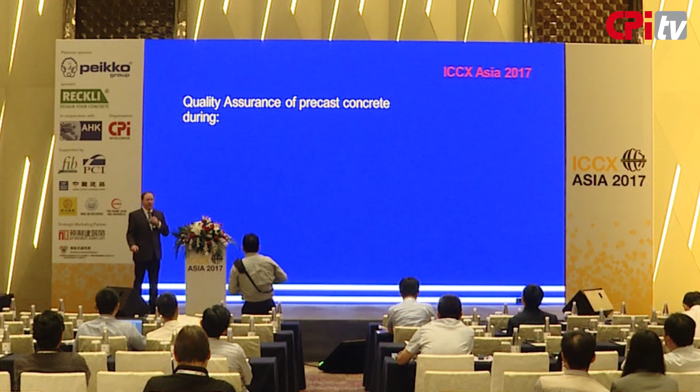So we'll talk about today the quality assurance of the design of precast, the production of precast, and then the final assembly. And each one plays a critically important role in the success of a project and the longevity of a precast concrete project.

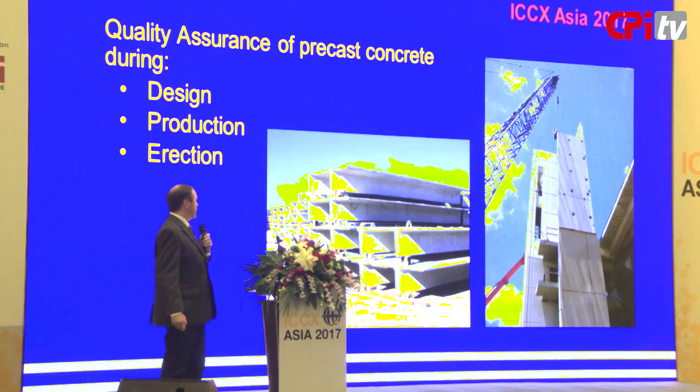So all of us here in this room, we're all stakeholders in the concrete industry, the precast concrete industry, and we're involved in construction, and we all know that construction can be difficult.

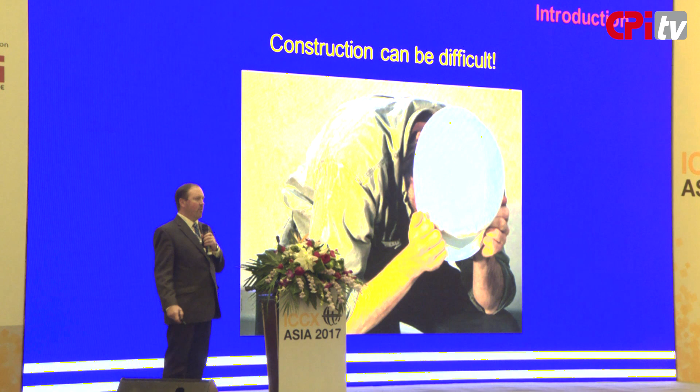And so we're going to talk about what we want to happen with respect to our projects. We talk about our first priority, safety, and that goes along the same lines of Professor Pampanin's explanation of producing a safe project for seismic events. We also want that project to be safe during construction and also during the lifetime of that project.

We also want that project to be designed and built as designed and expected. Of course, our architect friends and engineering friends all want that as well. On time, definitely, but even better early, right? So we definitely want on time and on budget, or even again, better under budget.

Of course, what that leads to then is our customers. We want happy customers. We want people to be happy who occupy these structures, during construction and throughout the lifetime of that project.

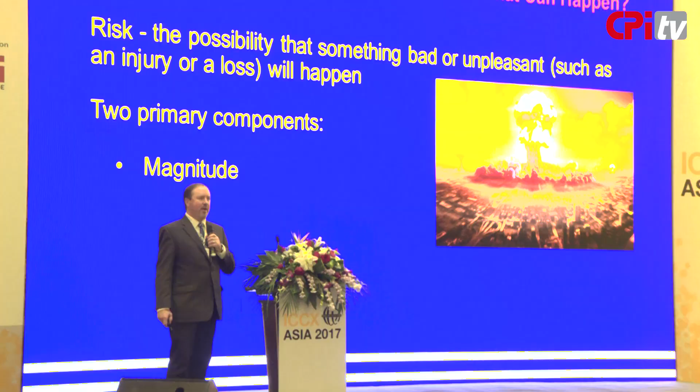So the two primary components of risk are the magnitude. Is it catastrophic, or is it something that just simply makes a bad day? And the other component is the probability of occurrence. So will this event, is it highly likely or unlikely? And that's how you measure your risk.

So our challenge here is to reduce our risk. How can we make that happen with a construction project?

So all projects are designed to meet some sort of expectations. Those expectations are generally defined in the project specifications. Sometimes it resides strictly in the architect's mind, and we have to become a mind reader to understand that, but that's another story altogether.

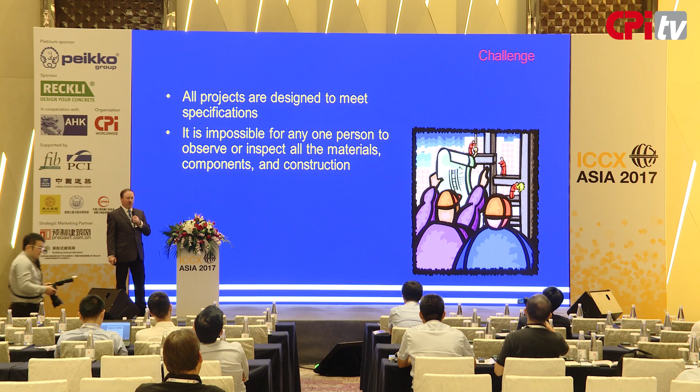It's impossible for one person to inspect and review and analyze every aspect of a construction project. No one person can inspect and review all the components, dozens if not hundreds of thousands of pieces and parts that take place on a project.

It's vital that procedures be in place that provide assurance that projects meet their design expectations. So how do we make that happen while reducing risk? Simple answer: a quality system, a documented system of checks and balances, analysis, plans, revisions, and this whole cycle goes over and over again.

It's critically important to understand that both quality and safety are linked. Of course, we want our buildings to be designed and built to be safe. That's what the public relies on design professionals and construction professionals to do. They rely on us to build structures that are safe not only during construction, but during the lifetime of that project.

Quality assurance is the best way to ensure that what you build is what you expect. Quality assurance and quality control are oftentimes used as terms that are interrelated, and sometimes they're switched around, so we'll clarify that here.

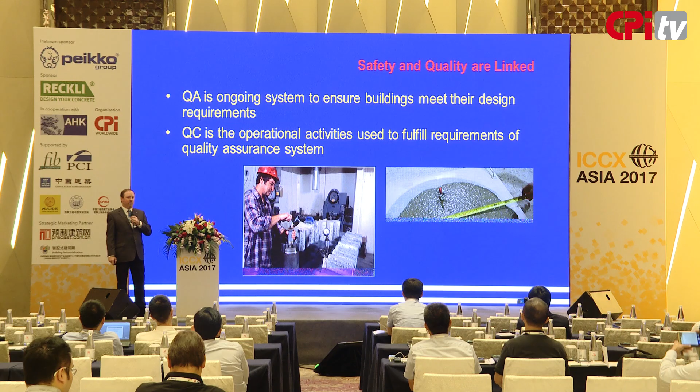Quality assurance is an ongoing system to ensure that buildings meet their design requirements. Quality control, then, is a part of the quality assurance process. It's really the daily activities that take place to check and measure and make sure that the quality assurance program is effectively being used.

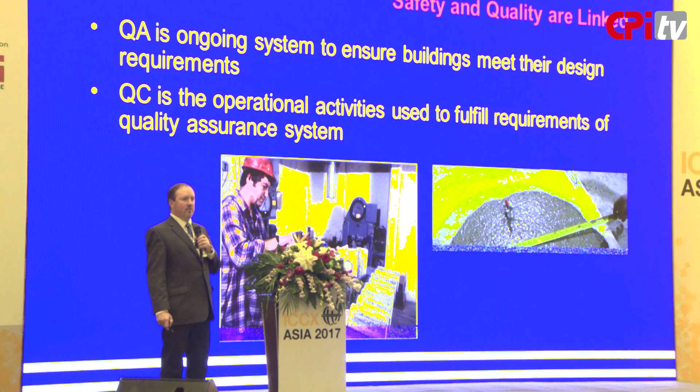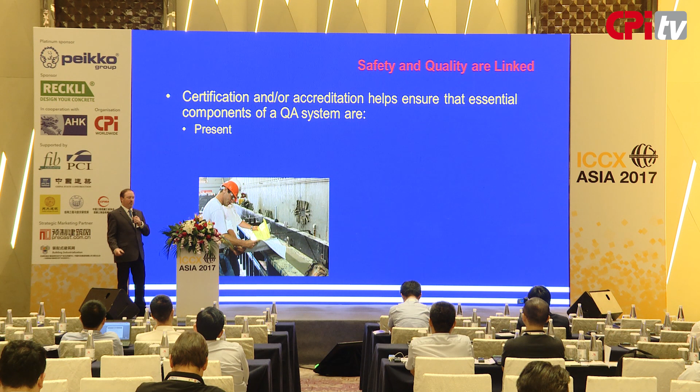Taking things one step further, we can talk about certification or accreditation. Certification is a higher level aspect of quality assurance. It's essential to verify that the essential components of a quality assurance system are both present and functioning properly. It also provides the highest probability of a successful project with that third-party verification.

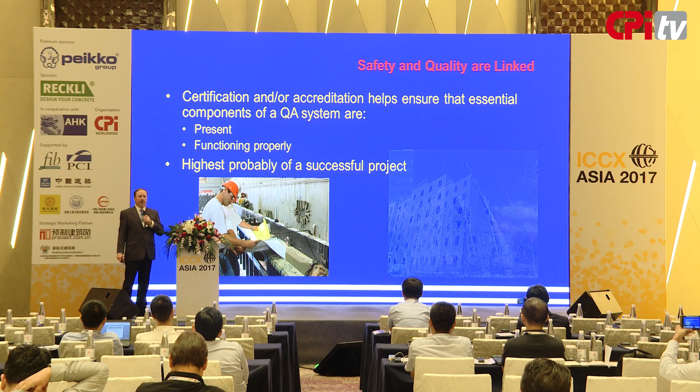With certification, people often think it's just someone coming in with their checklists, writing notes and checking things off, but it's really much more than checklists. Effective QA and certification programs are based on the industry's body of knowledge, and that body of knowledge is very important.

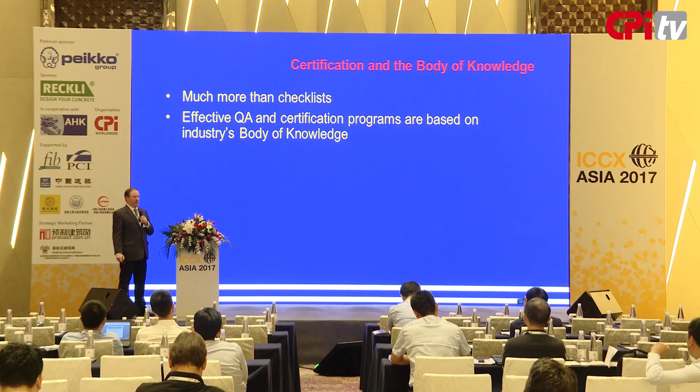The people in this room are part of the body of knowledge for the precast industry in China. Bodies of knowledge are generally developed by industry associations or institutes. The Precast Prestressed Concrete Institute is an example of an organization that's developed a body of knowledge—the collective knowledge of a group of stakeholders in an industry on how to design, how to build, the quality control aspects, certification, and so forth.

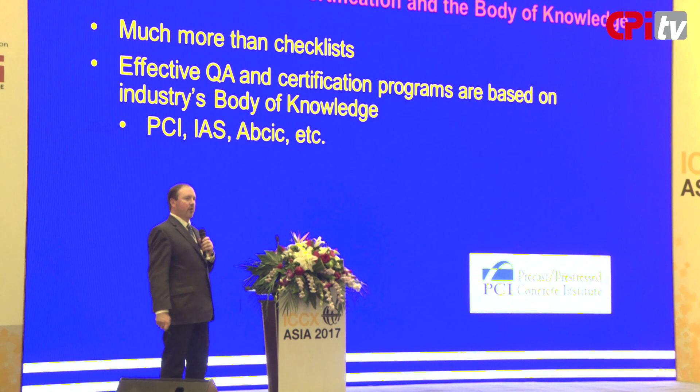Through the development of these bodies of knowledge, you can develop not only the design aspects for a project, but also the quality assurance aspects for production. I mentioned PCI—they've developed the body of knowledge for quality assurance, plant certification, personnel certification, and so forth. There's another organization, the International Accreditation Service.

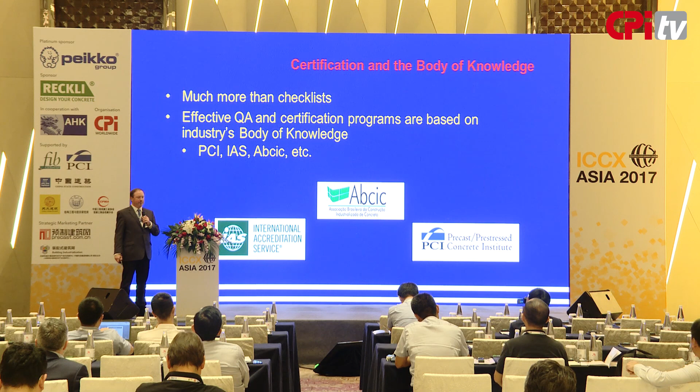They do the certification and accreditation of various organizations. And there's also ABCIC, the Brazilian Association for Precast Concrete, which has developed the body of knowledge in Brazil. These are just examples—it's important to have one organization really centralize the organization of that body of knowledge.

Let's talk a little bit about certification versus accreditation. Certification, again, is a program to check and ensure that the critical components of a quality assurance program are both functioning and present.

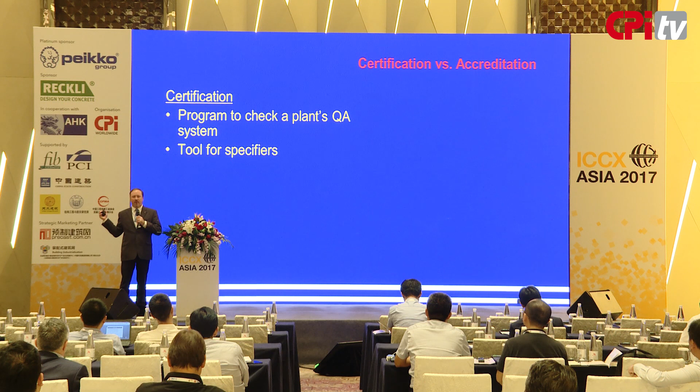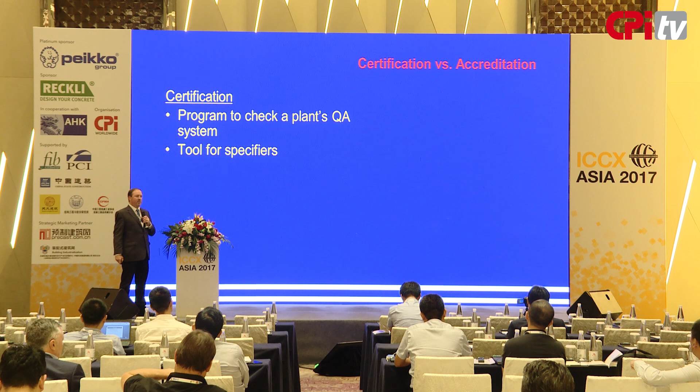Certification can also be used as a tool for specifiers. If I were an architect or an engineer designing a precast concrete project, I would want to know that the precast concrete producers fabricating the project's components are doing so at some minimum level of quality. To do that, you can specify the use of some sort of quality system—whether an off-the-shelf system, one you write yourself, ISO 9000, or a certification program that's already been developed, such as PCI.

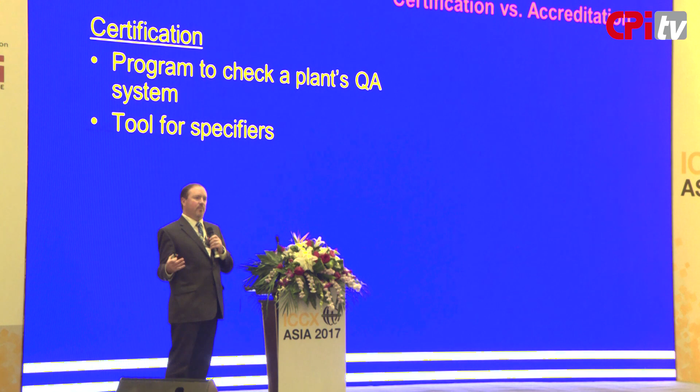It's a tool that lets you pre-qualify producers for your projects, and that's important. Just because you may or may not work for a precast plant, as a designer you have risk with those projects, and it's important to minimize your risk—this is one good way to do it. Owners and specifiers can pre-qualify and select producers based on qualifications already determined and evaluated through the certification program.

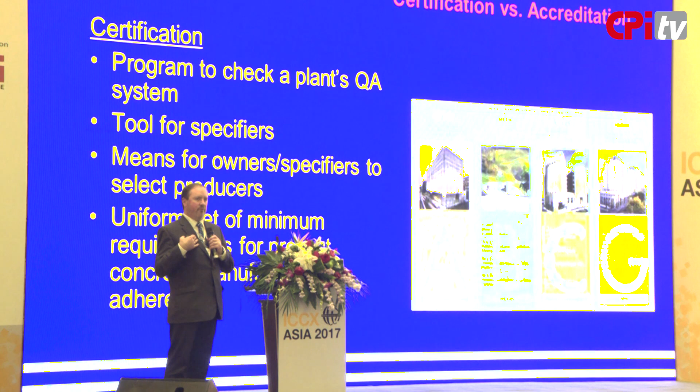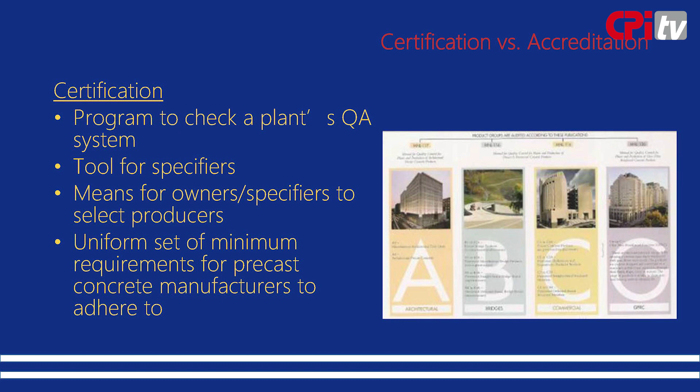On the flip side, if you're a producer, what I've heard from precast concrete manufacturers is they like when they see projects that require certification. What does this mean for them? It means all of the other plants submitting bids for that project also have to subscribe to some minimum level of quality standards, so they all operate on a level playing field.

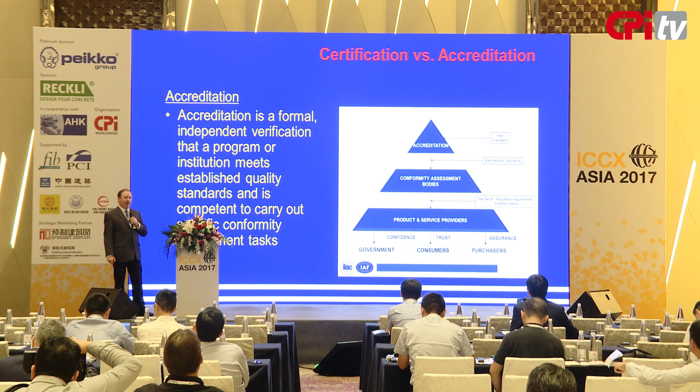Accreditation is another step above certification in general. Accreditation is a formal, independent verification that a program, organization, or institute meets established quality standards and is competent to carry out those specific conformity assessment tasks.

In this chart, the bottom layer of the pyramid is product and service providers, which would essentially mean precast concrete manufacturers. The conformity assessment body could be PCI, NPCA, or the Precast Association of China, should they wish to start a certification program.

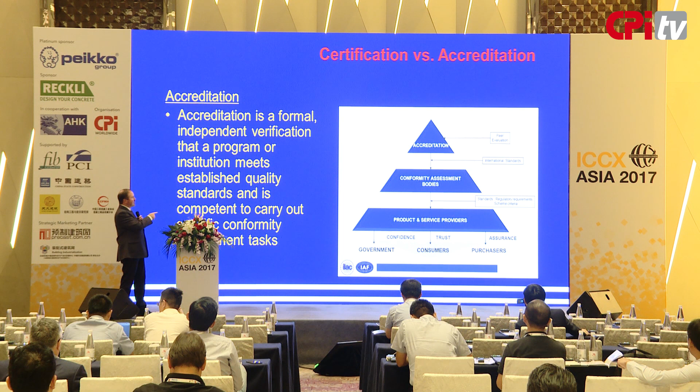Accreditation is one step above, where an organization verifies that the conformity assessment body, or certification body, is performing their certification activities appropriately and to international standards. One important note is the accreditation process does not necessarily require the conformity assessment body, but if you take out that middle tier, then you need technical experts to insert themselves into that process.

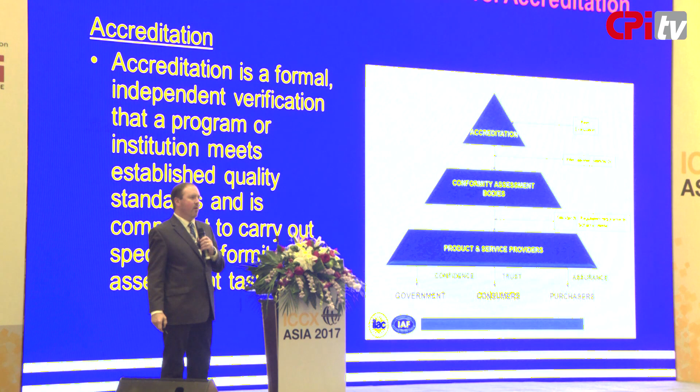The important thing is that the people at the bottom of this pyramid—the government, the consumers, the purchasers—they all want confidence, trust, and assurance that the bridges they drive across and the buildings they live in will be safe. They're the industry stakeholders this benefits.

So accreditation could be looked at as a certifying organization certifying another certifying organization, to verify that they follow international standards and best practices.

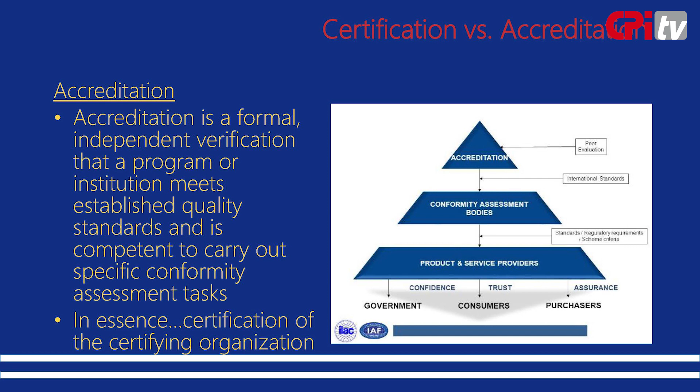We talked about the body of knowledge a little bit. It's a weird term, but it basically means the collective knowledge of the industry. There's not one person who has the body of knowledge, and it isn't simply the books on the shelf that an organization publishes—it's everything they do, all their activities, all their research and development, all those things that go into that collective knowledge.

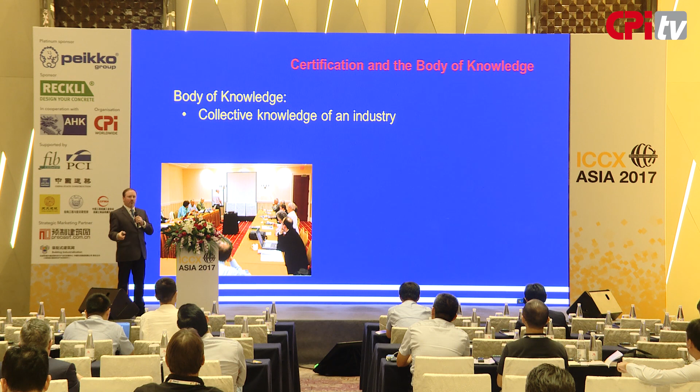That body of knowledge is used to develop building codes, design guides, education programs, and of course certification programs. But they're all essentially developed by people like you.

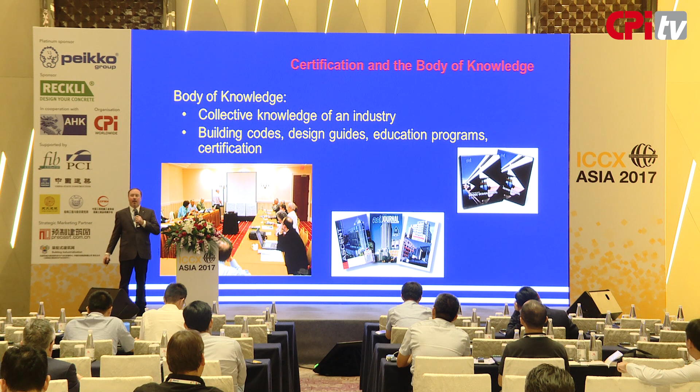Key elements of developing a body of knowledge include industry involvement. You've got to have a broad stakeholder aspect so that you have users, academics, designers, and even general interest—just people off the street, the public—because if they drive down the streets, they have an interest in the safe operation and construction of projects.

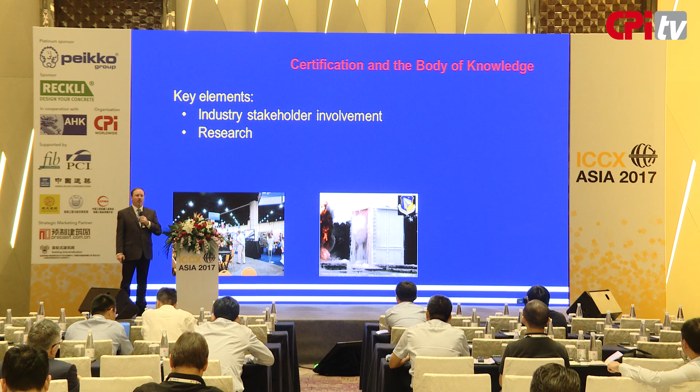Research is an important aspect where you can validate new ideas or new design concepts for engineering. In this case, there was validation of blast resistance—this precast concrete wall panel is being subjected to a high blast force, as shown in that middle picture. We want it to perform as we expect, and we do that through research.

Continuous maintenance is an important thing. You can't just take that body of knowledge and say, okay, we've got it, we don't need to maintain it anymore, it's good to go. It's something that has to be continuously maintained, again through organizations such as the concrete associations of various locations.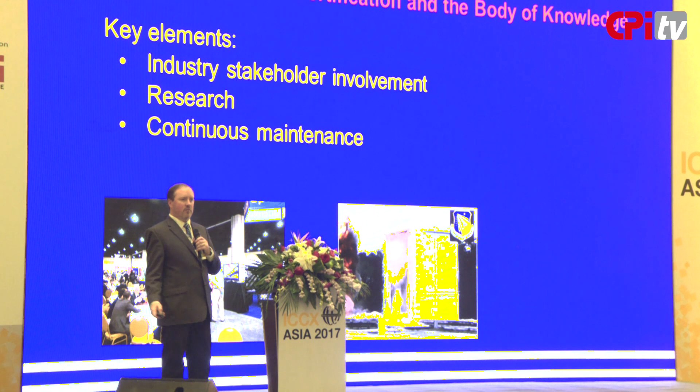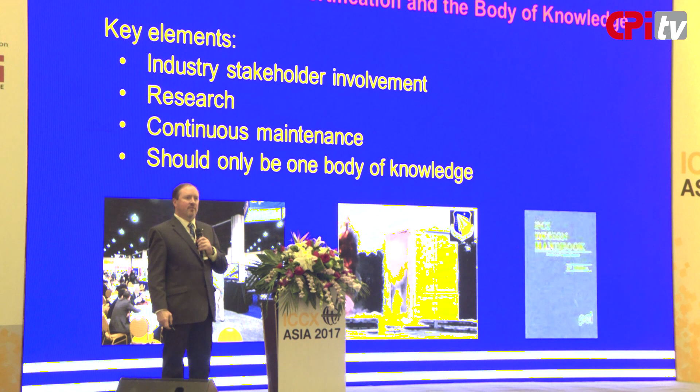One key point is that because everything comes from the body of knowledge, you should really only have one, in essence—because if you have multiple bodies of knowledge, it could cause confusion among building officials, designers, and people trying to apply the design concepts derived from that body of knowledge.

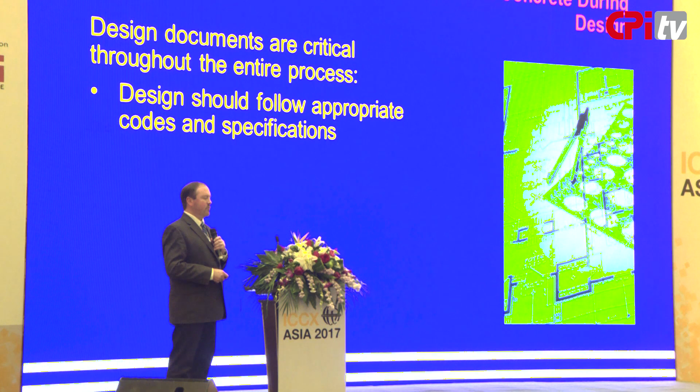During design, that's where everything starts to meet the paper, so design documents are critically important to the success of a project. Those designs should follow the building codes developed from that body of knowledge, and there should be a system in place to verify that the codes are followed correctly, and that calculations are done appropriately and verified. This should all be a documented quality system.

Another important thing I've seen is that design documents are revised again and again. So from the design office to the production floor of the precast plant, we want to be sure the most current version of those design drawings is being used. You have to have a process in place to ensure those design documents are current, because once you cast it in concrete, it's stuck that way pretty much.

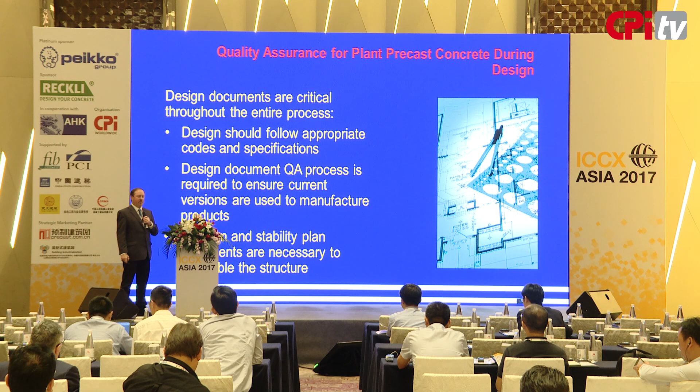And then for the erection process, the documentation process continues with the development of an erection and stability plan to ensure the safe assembly of the structure.

And then once you have the design process in place and you begin production, this is where the rubber meets the road as far as producing a quality project. So there are several key elements that are essential for establishing a good quality assurance process in a plant.

First and foremost is your people. Your people in the plant are your most important asset, and they should be properly trained or certified when necessary.

Another aspect is to make sure that your production demands do not overrule quality. So when we go into a plant and look at their organizational chart and how personnel report up to management, we want to make sure quality control personnel don't report to the production manager. We want to see that they report to top management or engineering, but they should not be in a situation where the client or contractor is demanding product be shipped to the job site while there's a quality problem that needs to be addressed. The two should be separated, the quality should be addressed, and then shipped. You don't want production demand to dictate what goes out the door and what gets shipped to a job site.

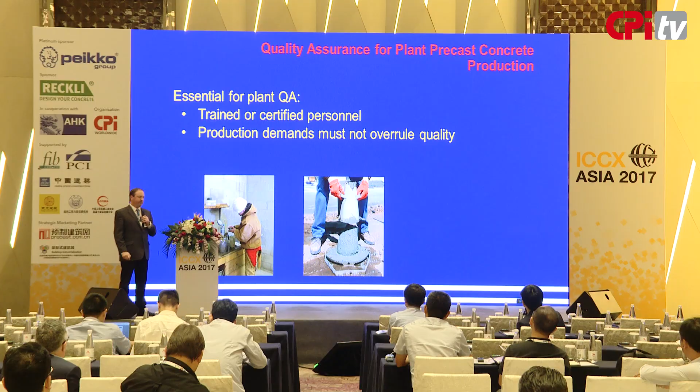And I've seen this also. You want the quality assurance and quality control aspects within an organization to be accepted by everyone, from the laborers all the way up to the president and top management of the company. Because quality assurance programs are not things you can switch on and off from project to project. It has to be something integral in the culture of an organization.

And I'm sorry to say, but I've been in some plants where it was obvious right away that the quality assurance program was not supported by top management, and there was a clear conflict between production and quality. So it has to come from the top, and it has to be drilled down, because it's everyone's responsibility to do things right within the organization. It's not just one person.

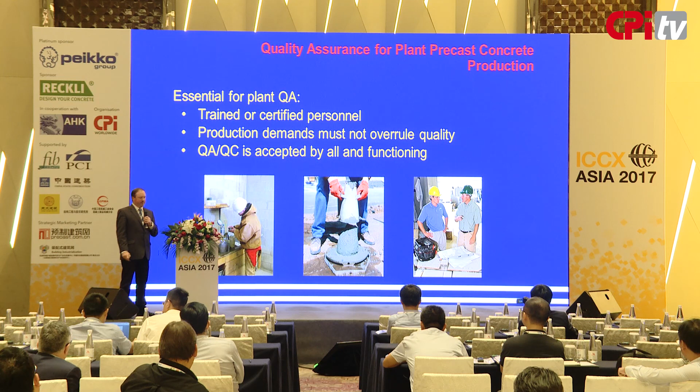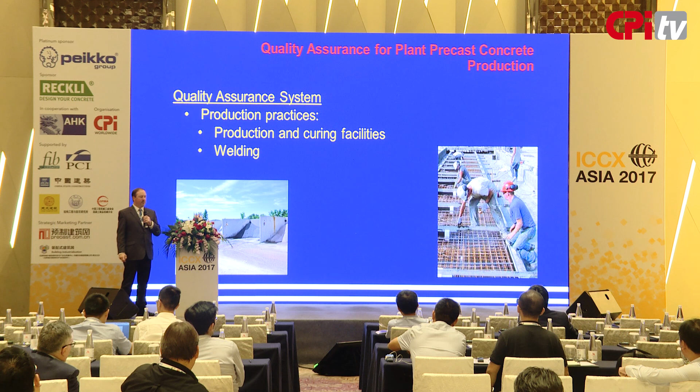As far as production practices are concerned, you should have a plant-specific quality management system that addresses certain aspects. Those production aspects are very important to the final quality, and they include your production and curing facilities, welding—if you do welding within the plant you have to ensure you have quality processes in place—and also your forms and molds, which are very important to the final geometry of the products.

Additionally, your hardware installation. In the United States, we have a saying: measure twice and cut once. So you always measure something twice before you do something you cannot change in the future. And the same thing applies to precast concrete.

We call it the rule of tens. Let's say you're in a production facility and there's a problem with the location of an embedded part, a lifting apparatus, or a connection. If that error is discovered in the plant before the concrete is cast, it costs, let's say, $1 to fix. If you cast it and it's still in the wrong place, but it hasn't left the plant yet, now we're talking about $10 to fix. And if it gets shipped to the job site accidentally and the problem still exists, then it's going to be 10 times that, or 100 times what it would have cost to fix before you cast the concrete. That's what we mean by the rule of tens—it's always best to catch these things as early as possible.

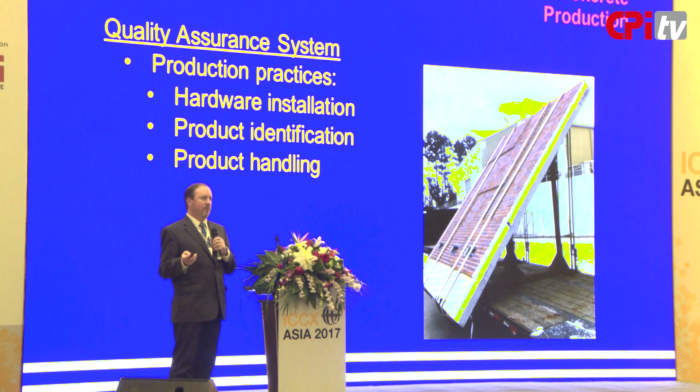Product handling is interesting because the structural design of many precast concrete products accounts for the worst case scenario and highest stresses. When does that occur? Often during very young age, when the concrete hasn't reached ultimate strength and when it's being handled, lifted out of the form, stripped out of the forms, and assembled onto the job. This is a very critical time for the condition of precast concrete, so you want to make sure you're handling and lifting it appropriately.

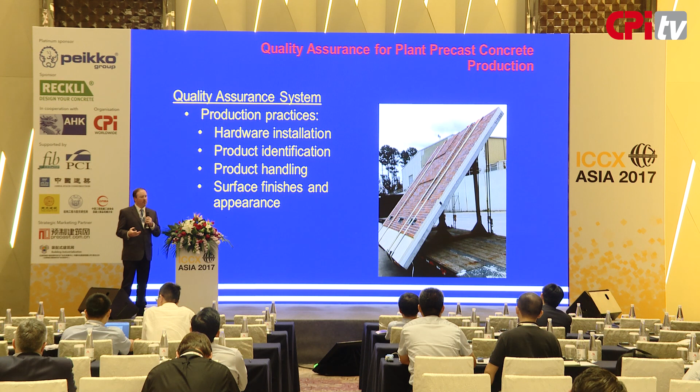Surface finishes and appearance matter too. The structural engineers want to ensure the product works structurally, but the fact is most complaints I've received have to do with what it looks like. Does it meet the architect's expectations? Is there staining? Are there cracks? Is there mismatching between wall panels? These are important things to designers, and we need a system in place to ensure surface finishes and appearance meet the owner's or designer's expectations.

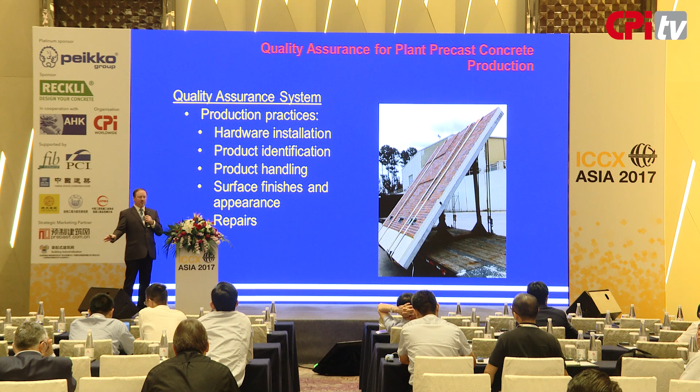Sometimes things happen and you have to repair a piece that was dropped, or a crack formed, or there was some honeycombing on a piece. But that's okay, we can repair it. We have processes in place for that, but you need a documented system for doing it, and you should classify repairs as major and minor. Minor generally means something easy and non-structural, whereas a major repair is something structural that needs to be evaluated by the plant engineer. So those processes need to be documented.

Raw materials and accessories are things the plant receives from a third party, so you're relying on them to supply something that meets a minimum standard. But it's still up to the plant to ensure what's coming in meets their specifications. So you have to have a process for all concrete raw materials, verifying through chemical analysis, mill test reports, and other documentation that it meets specifications.

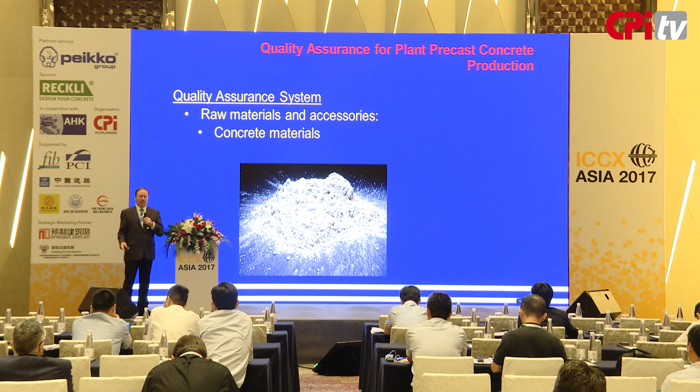And of course, reinforcement and hardware. Reinforcement is key for our structural capacity.

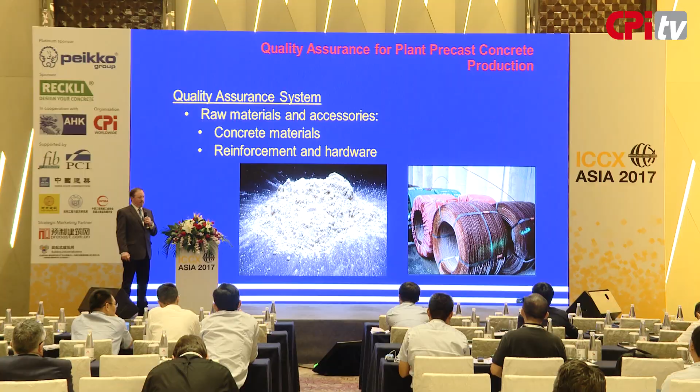The concrete itself, mix proportioning, is an important aspect of producing precast concrete components. Most plants I've been to have their own batching and mixing operation, so this is something they're directly involved in. Mix proportioning is an important aspect.

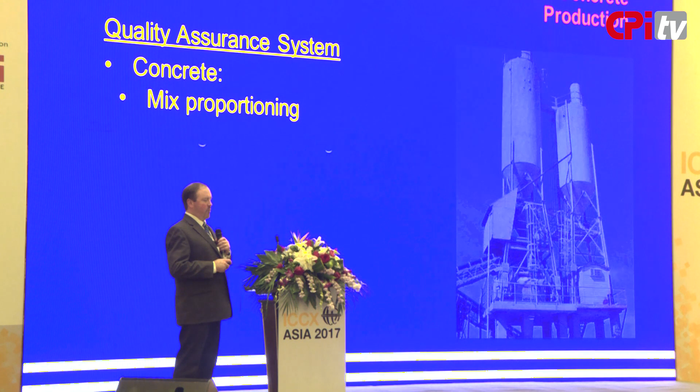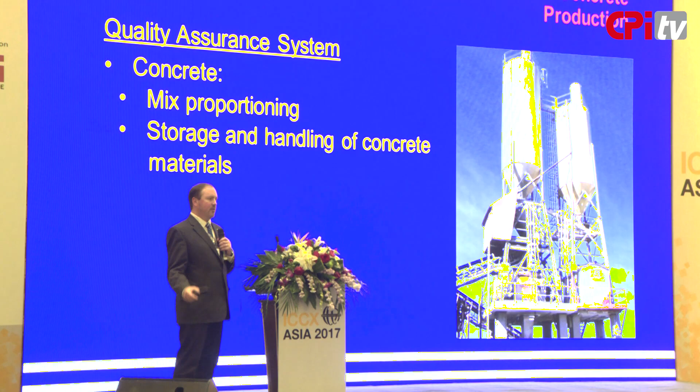Storage and handling of raw materials is important, making sure there's no contamination, that they're handled correctly, that coarse aggregate does not segregate. Your batch plant scale should be calibrated, and the whole system should give you what you expect. So when you batch a load of concrete, it should give you the weights of materials you're expecting.

Transporting equipment is also important, because you can have a very good mix, but if you use the wrong transportation equipment your mix can settle or segregate.

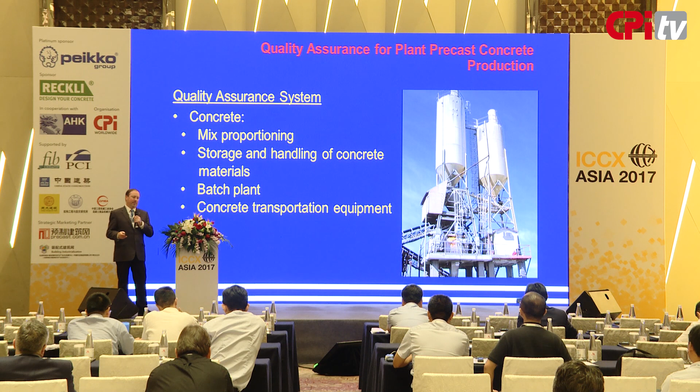Placing and handling equipment are important. Each operation has a little bit different way of doing things, so those specific methods of producing precast concrete should be addressed in the plant quality system manual.

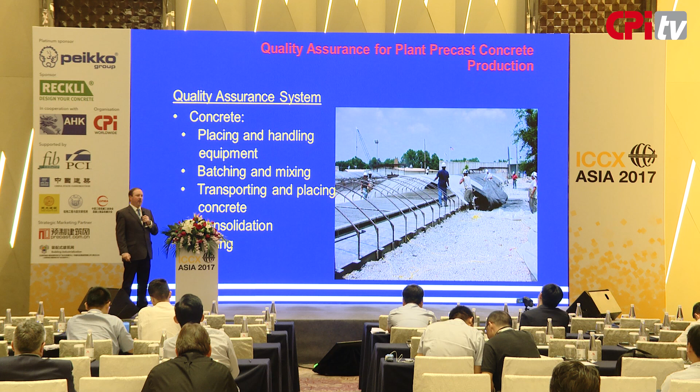We talked about batching, mixing, and transporting—very important aspects. Consolidating concrete: more and more we're seeing self-consolidating concrete, so this hasn't been as much of an issue, at least in North America. I don't know how much is used in China, but it's been helpful in the United States, eliminating a lot of problems with consolidation and honeycombing. Surface appearance looks very good. And curing can have a substantial impact on the long-term durability of your concrete.

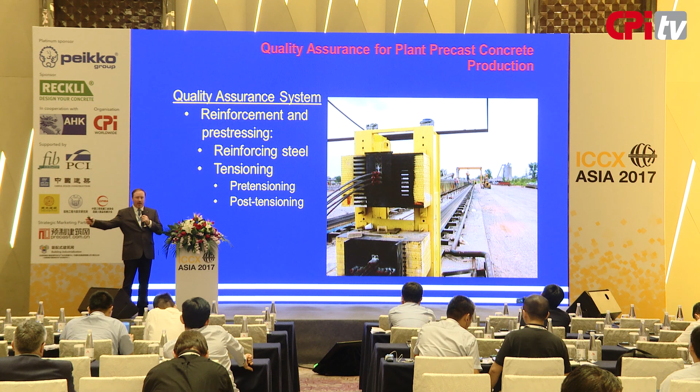Reinforcing and pre-stressing: the placement of reinforcing steel is very critical, as well as the tensioning operations, whether pre-tensioning or post-tensioning. You have to have proper QC checks for verifying elongation and the proper force in those tendons.

Quality control operations, these guys are always very busy. They're busy inspecting and testing various raw materials, concrete, pre-pour and post-pour inspections, and they're also doing a lot of record keeping.

Record keeping is necessary for quality control. Oftentimes neglected, but very, very important, especially when you want to prove to someone that you've followed proper procedures. If something happens later on, some sort of damage or collapse, you want to make sure you have information in your files to prove that you did what you say you did correctly.

Most plants will have laboratory and testing facilities on site. If they don't, then they will outsource that and have someone else do the testing for them.

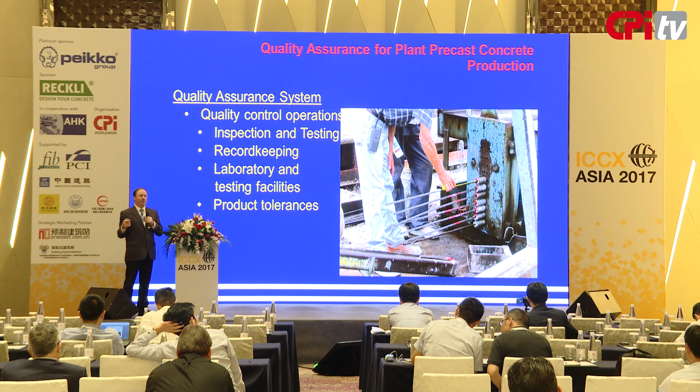Product tolerances are very important because you not only have to put the building up and have it be plumb and have pieces fit together correctly, but you also have to deal with your interfacing tolerances between different materials. Your windows will have different tolerances, as well as other materials being used in the building or project.

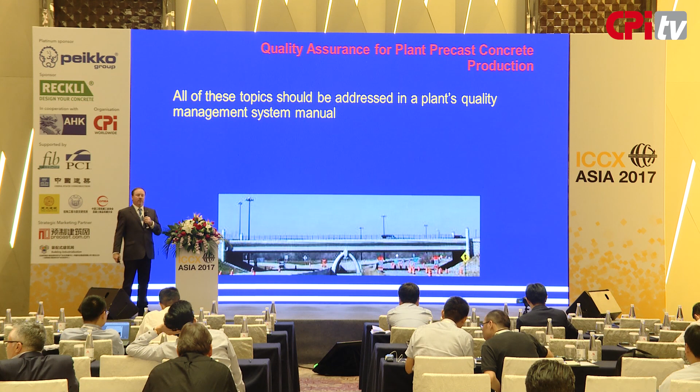All of these things should be addressed in a plant-specific quality management system, written for that location. You can't just take a quality management system manual from another organization and put your name on the top and say, okay, we have our quality management system, because it's very specific to that operation and that location.

That quality manual should be reviewed at least annually, if not more, or whenever necessary, and that should be done with top management involved, not just the quality people.

They should also perform annual internal audits. Those internal audits should be done by someone who is not directly responsible for the work that they're auditing. So I shouldn't be auditing my own work. If that's the case and I'm doing an internal audit, I need to ask someone else to do the audit for me.

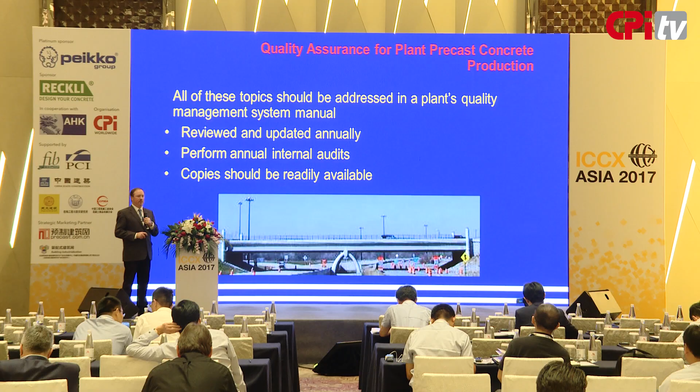Copies of those manuals should be readily available throughout the production plant so people can easily access them. Whenever changes are made, those manuals should be replaced, and make sure that everyone has a copy of the current manual. I've seen that.

So we've done all this work in the plant, we've done all this work to be careful about the design, and then we go to the job site, and we need to make sure that same careful attention is also taken to the project site.

Proper erection is vital to the performance and safety of the structure. I can't say this enough. At one point in time there was a major collapse, and that was the reason why the PCI erector certification program came into existence, because there was an issue that took place.

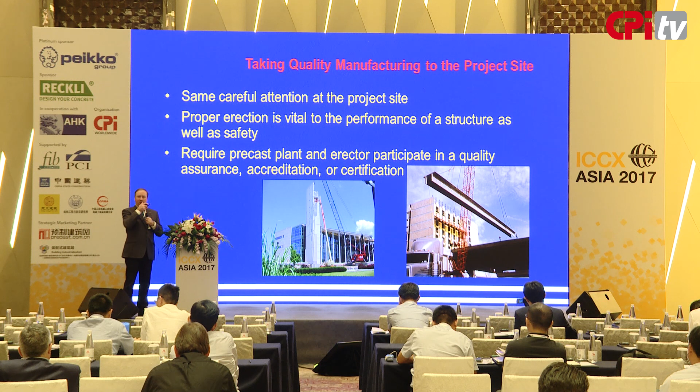We want to make sure that not only does the precaster follow a quality assurance program, but the installer or erector follows a quality assurance program as well. That program really focuses on safety. There's a lot of safety that goes into the erection procedures.

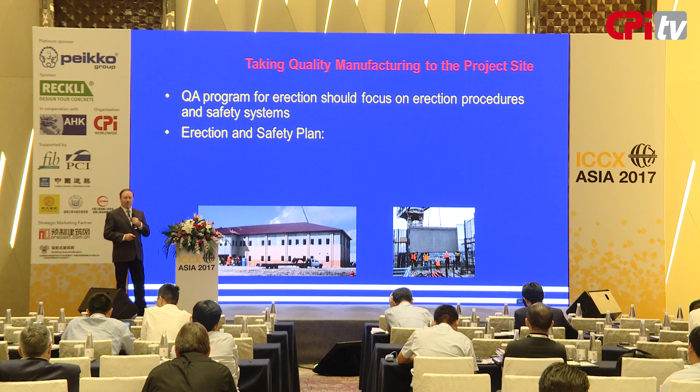The erection and safety plan should be specific to that project. They have to address specific fall hazards and protection issues. You talk about the scope of the safety practices of erection and patching, because we know that patching sometimes takes place on the job site after it's been installed, so we have to do that safely.

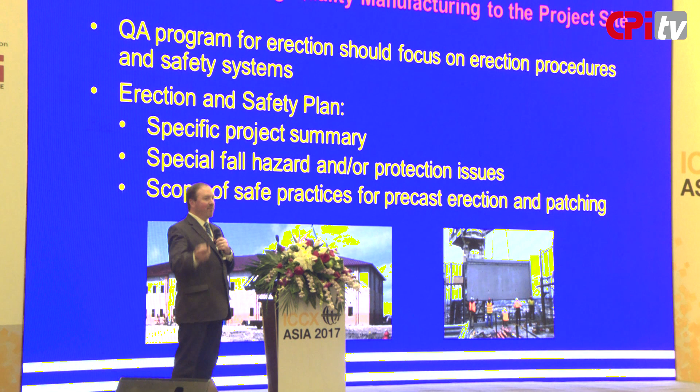You should define your safety monitor duties - that's the person who's in charge of safety on the job site - and talk about the type of job site safety practices that will be employed, including a daily job site checklist for erection safety. All these should be documented.

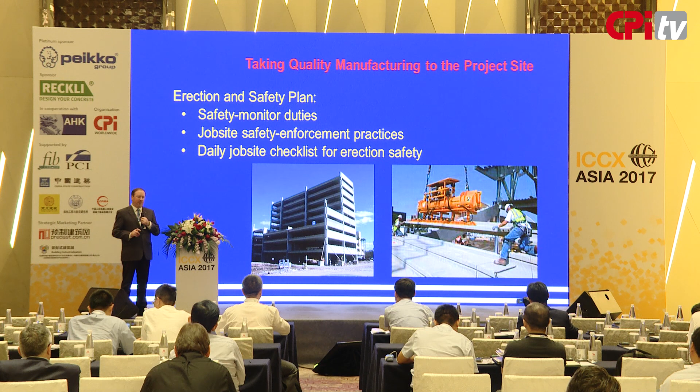You should have a drawing that shows where the crane will be located, where the trucks drive in and unload the product, and access roads. You should have some sort of documentation about sequencing of erection and bracing plans, and a list of emergency contacts. If an emergency should happen, you should be able to get in contact with emergency people right away.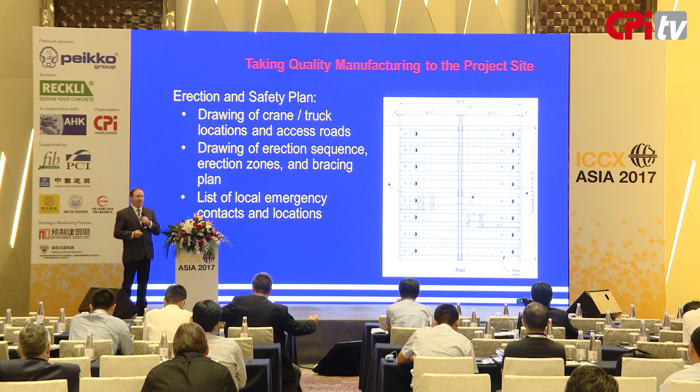So you need to review the rigging and bracing requirements - now this is an interesting one - the adequacy of the foundation is very important. This may not be something that a precaster is directly in charge of, but they're going to be setting their pieces on that foundation. We had a problem with a foundation many years ago, and that's where that collapse occurred. That's why we now have something in our erection procedures that specifically addresses foundation adequacy.

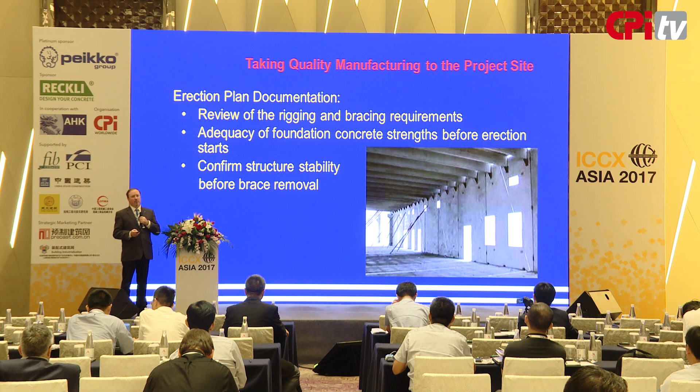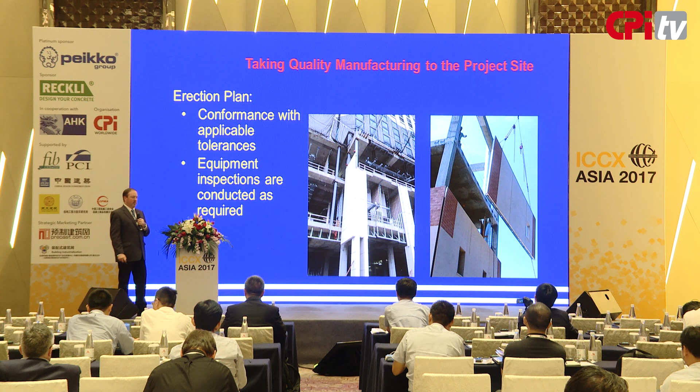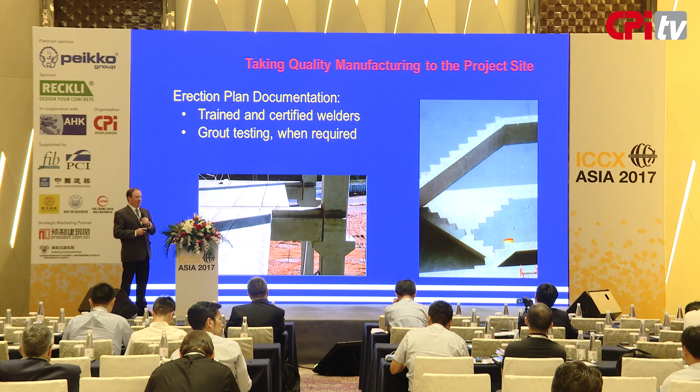Of course, we talk about our people again. You need to have trained and certified welders—there's quite a bit of welding on projects in the United States. Grout testing is also important; we had another problem with grout not too long ago. These are little things that, if you don't pay attention to them, can become very big problems later on. And piece handling—these pieces may not have reached their ultimate strength, so you could be subjecting them to high stresses, and you want to make sure it's done appropriately.

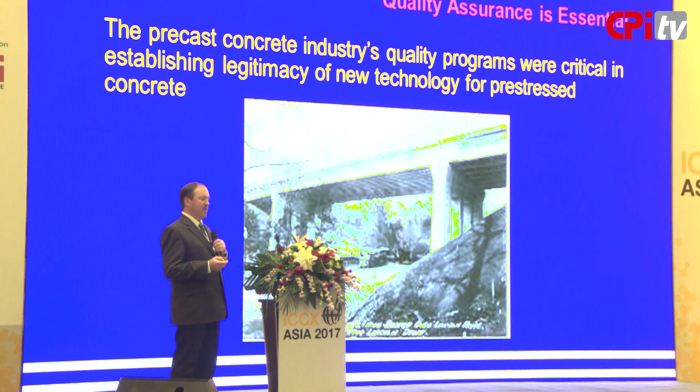So quality assurance is essential. Looking at the programs developed in the United States in the 1950s, pre-stressed concrete was an unproven technology. PCI developed their body of knowledge, the certification program, and the design documents at the same time, to provide legitimacy to the pre-stressed concrete technology. If it weren't for that, it may not be as successful as it is today.

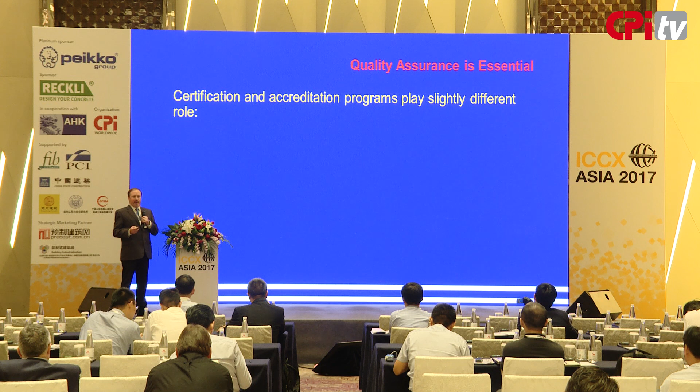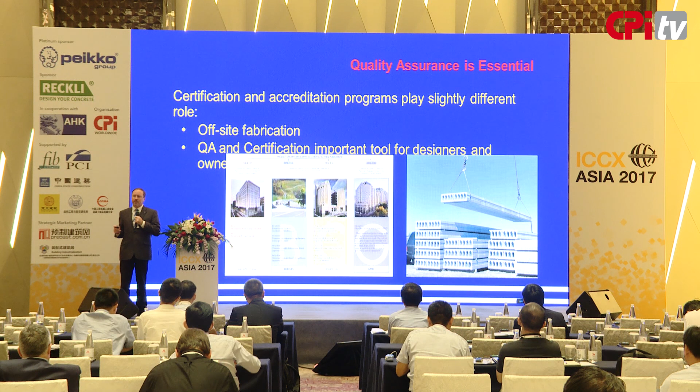Today, the certification and accreditation programs play a little bit different role. Because pieces are fabricated off-site, job site inspectors don't have the ability to observe and inspect products being fabricated in a factory, so we have to provide that assurance that it's being fabricated correctly. The certification programs are also a tool for owners and specifiers to pre-qualify producers.

Certification programs have played a critical role, and quality assurance programs have played a critical role and will continue to play a critical role in the success of the precast and pre-stressed concrete industry—not only through the development of the technology and the proof of technology, but also as we want to ensure that structures are safe now and in the future. I'm confident when I say that the precast and pre-stressed concrete industry would not be as successful today, at least in the United States, if it weren't for the certification and quality assurance programs that PCI developed. And that is my conclusion. Thank you.

Thank you, Dean. Listening to your presentation, it brings me to a question—in Germany and also in some other countries, in reality, it's sometimes very expensive to reach 100% perfection immediately during production. That means producers accept that they produce maybe 95% perfection and then do some cosmetics afterwards. How would that fit into a quality assurance system?

Well, we go back to what I said before—you have to manage the expectations. This happens a lot, and the designers and architects have to understand that there might be some of those types of fixes that take place on the job site. If they have that system documented in their program, it's okay. But that's when I get those phone calls from people saying, 'this doesn't look the way I was expecting.' And you say, 'well, is the producer going to fix it?' 'Did you ask?' 'Oh, maybe I should ask that.' Of course the producer has a plan to fix it. So it's all about that management of expectations—I think that's an important aspect.